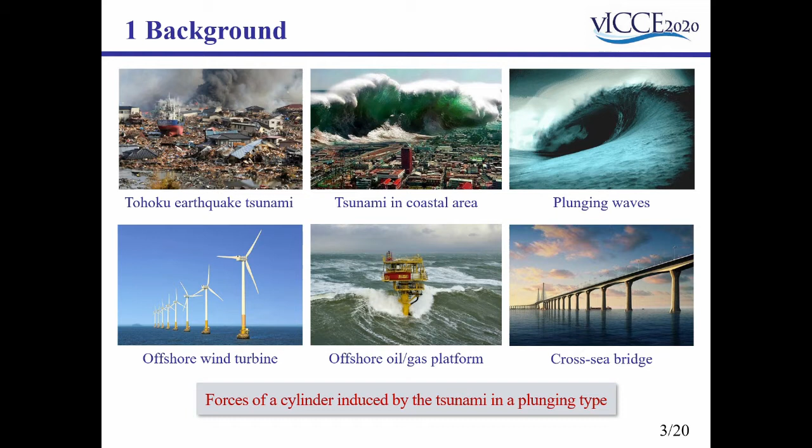Solitary wave theory has been frequently employed in the study of tsunamis due to some properties. There are many studies about solitary waves and their interaction with a cylinder. But regarding plunging solitary waves impacting a cylinder, few studies exist. Numerical models face problems such as huge calculations and low reliability.

For experimental tests, most applied PIV to test plunging solitary waves impacting a cylinder, but only surface evolution and velocity fields were investigated. Therefore, in our study, wave forces on a cylinder induced by plunging solitary waves are investigated experimentally.

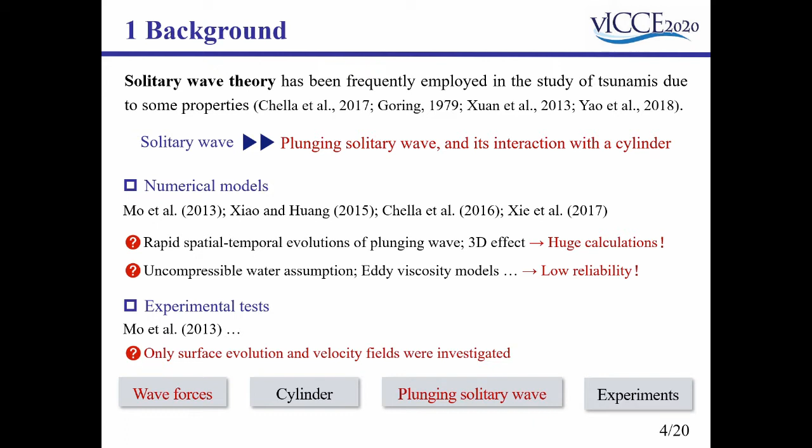This part is our experiment. This experiment was conducted in a wave flume, 22 meters long, 45 centimeters wide. The water depth is 20 centimeters. This is a sketch of the experiment setup. Wave gauges are located along the wave flume.

A trapezoid bar is placed in the middle of the flume to cause the solitary wave to morph into a plunging breaker. And a cylinder with a diameter of 6 centimeters is placed 5 millimeters above the flat portion of the bar. The top of the cylinder is connected to a force transducer. Prior to and during the wave breaking, surface profiles are captured by a high-speed camera.

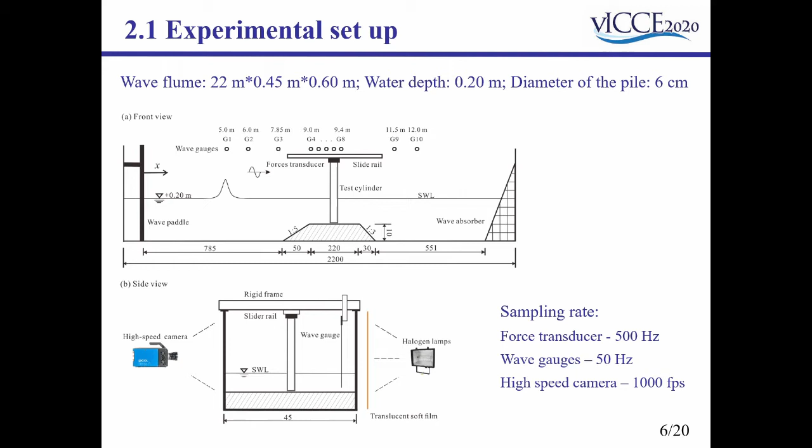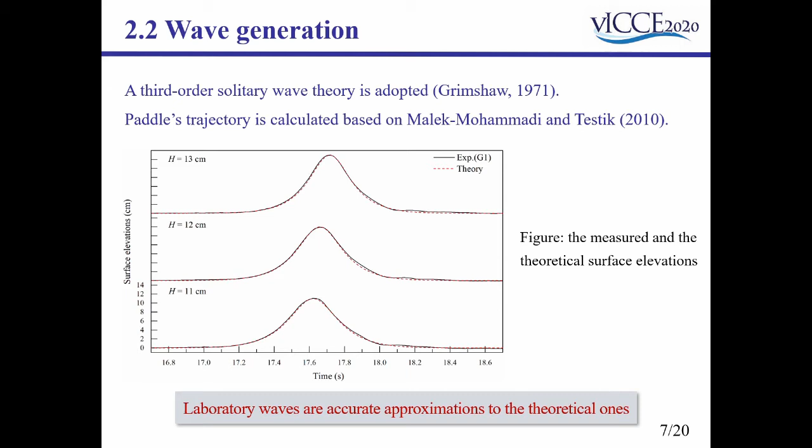In wave generation, a third-order solitary wave theory is adopted, and the paddle's trajectory is calculated by the MT method. This is a comparison between the measured and theoretical surface elevations in the time domain. X-axis is the time, y-axis is the surface elevation, and we have 3 incident wave heights. The good agreement confirms that the laboratory waves approximate the theoretical ones well.

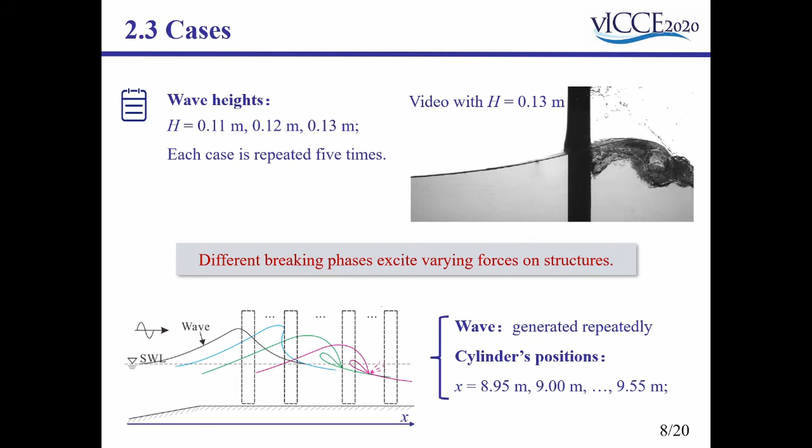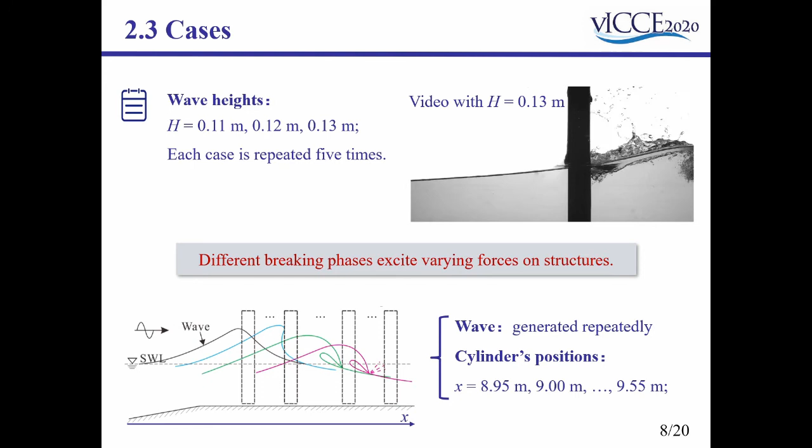For cases, we have 3 incident wave heights. The right video shows the case with the maximum wave height. Besides wave height, we know plunging breakers evolve both in space and time. Different breaking phases excite varying forces on structures. Hence, we generated the wave repeatedly and shifted the cylinder to different spatial locations within the breaking region. Each wave height includes 13 cylinder locations.

This part is some results and discussion. This figure shows the measured forces for one case. We can see a drastic oscillation follows the peak value, bothering our analysis. This is because large hydrodynamic forces can excite structural reaction. Conversely, structural reaction will influence the hydrodynamic force. These 2 processes will be included in the measured force.

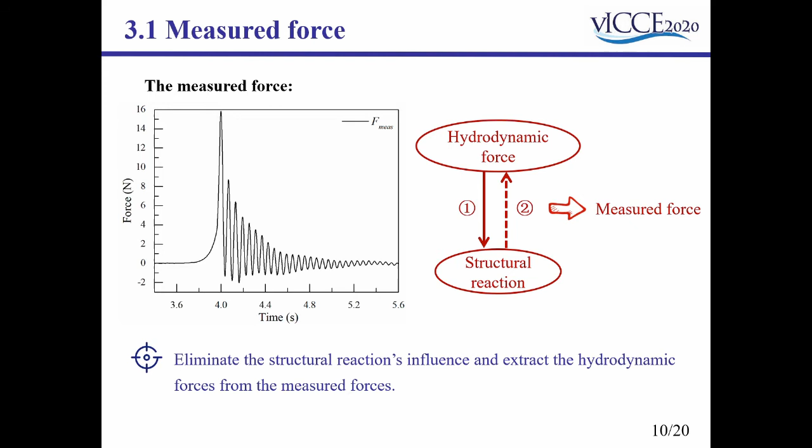In our experiments, the displacement of the cylinder under wave force is very small. Therefore, process 2 is ignored. Next, we should extract the hydrodynamic force from the measured forces, and thus a method is needed to eliminate the structural reaction's influence. The structure's reaction is closely related to the cylinder's properties, which are expressed by the natural frequency and the damping ratio. Generally, these 2 parameters are constant.

However, when surface elevations are included, the mass and its distribution change with respect to time, thus affecting the natural frequency and damping ratio. This is not considered in most experiments. So we conducted different tests at different immersed depths in order to find the relation between natural frequency, damping ratio, and the surface elevations. For hammer tests, based on the equation of motion, we can derive this equation.

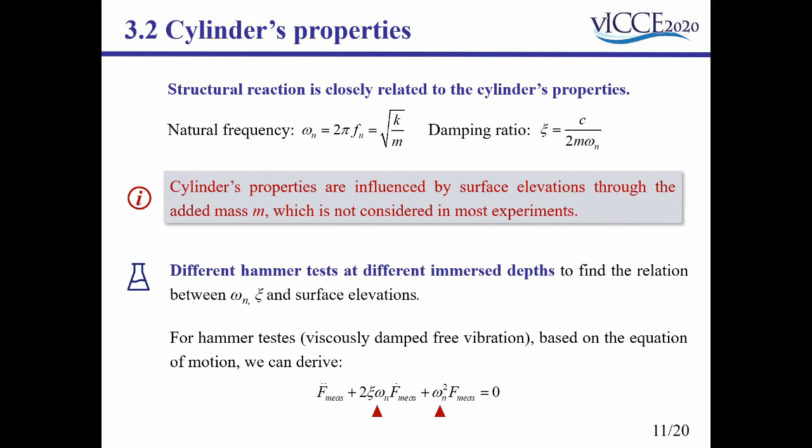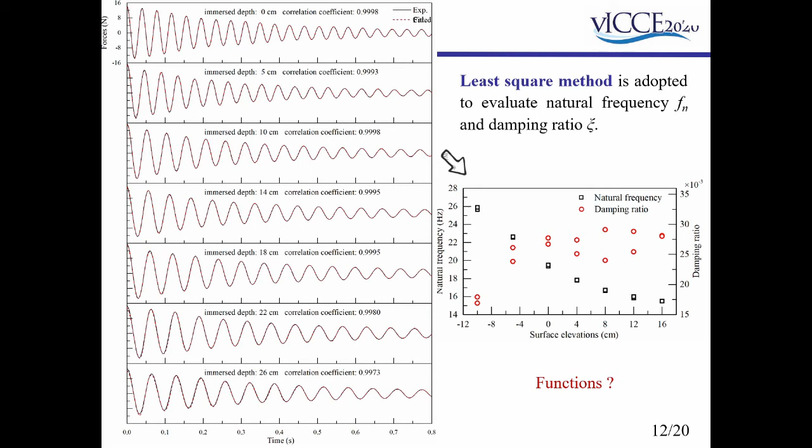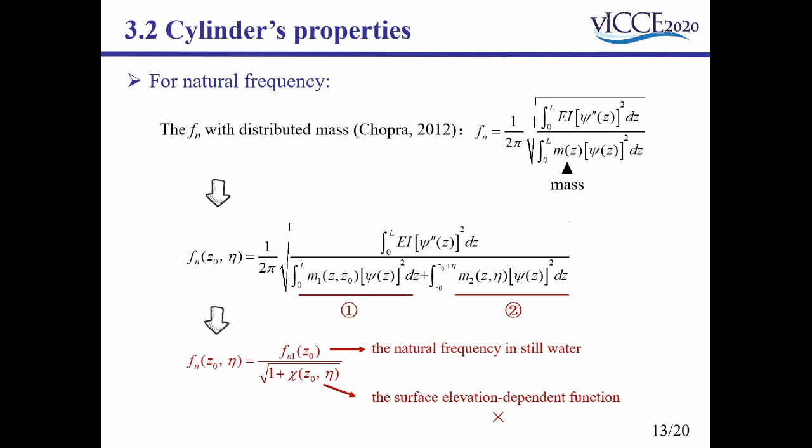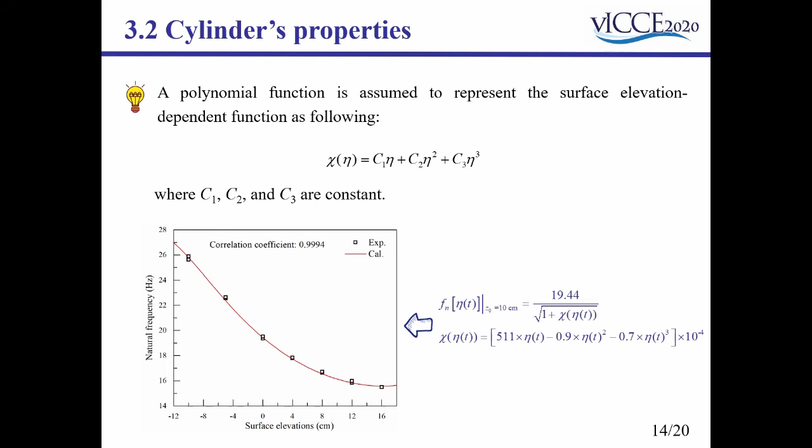However, the analytical expression of the surface elevation dependent function cannot be given due to the unknown deflection of the tested cylinder. So we use a polynomial function to replace it, and the constants C1, C2, and C3 are determined by the least square method. This figure shows the experimental data and the fitted line. Finally, we get the function for the natural frequency and surface elevation.

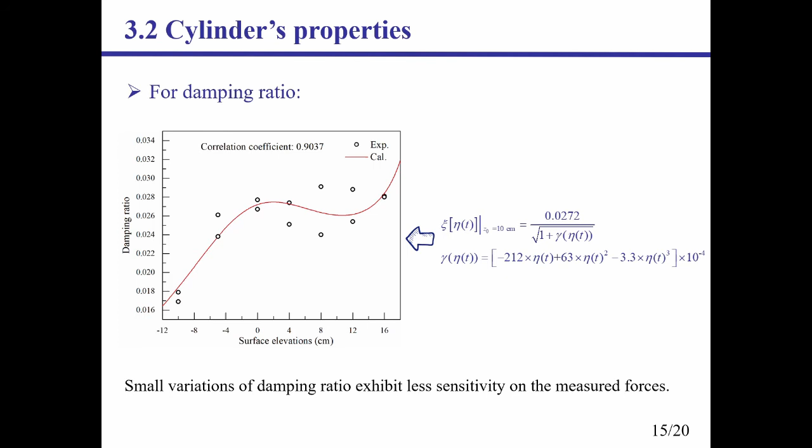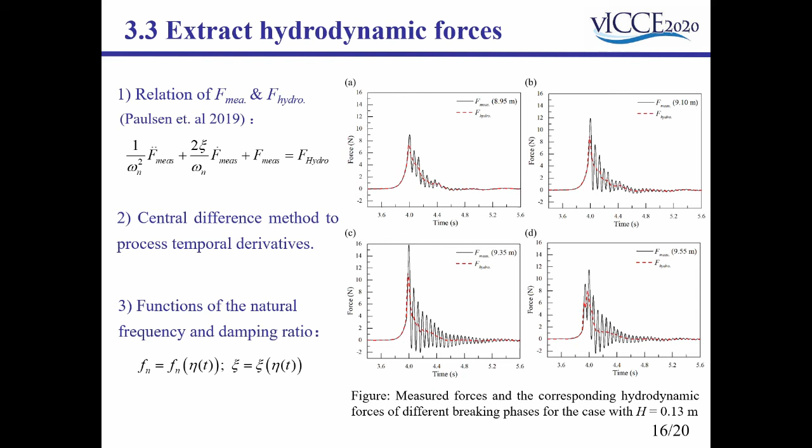Then we start to extract hydrodynamic forces. This is the relation between the measured force and the hydrodynamic force. Then the central difference method and the functions of the natural frequency and the damping ratio are used. This figure shows the measured force and the corresponding hydrodynamic force for different cases. We can see the measured forces experience dramatic oscillations after reaching their peak values, while the corresponding hydrodynamic forces show essentially no oscillations throughout, indicating that the likely influence of the structural vibration is removed successfully.

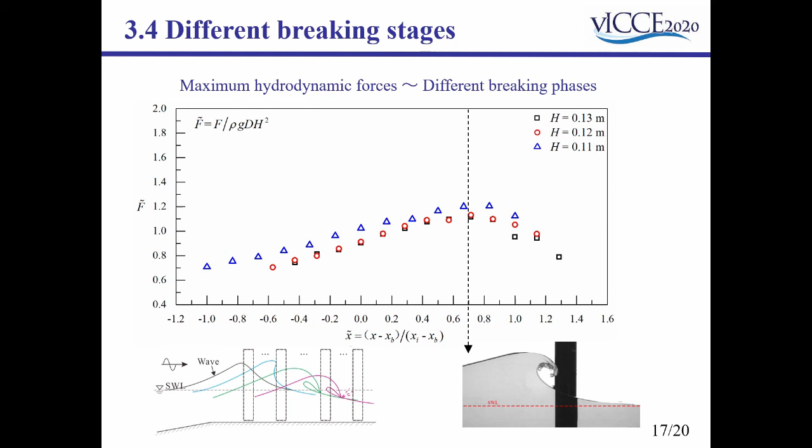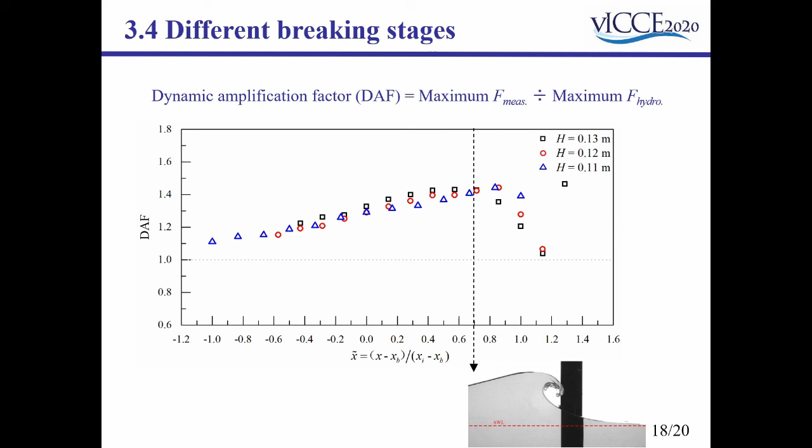Finally, we summarize two main conclusions. The first is that a method based on the equation of motion is proposed to extract hydrodynamic forces, and the surface elevation's influence on properties of the cylinder is considered. The second is that the maximum measured forces, hydrodynamic forces, and DAF occur approximately at the same breaking phase, that is when the plunging jet has curled down, but prior to its impingement on the water surface.